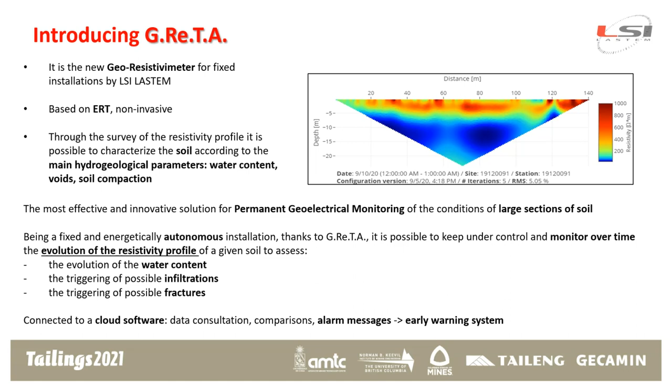The system is an off-the-shelf solution, easy to install in a maximum of one working day with 2 technicians, and does not require a complex configuration, which can be done remotely if required. Here there is a short video with the characteristics of the system and some of its applications.

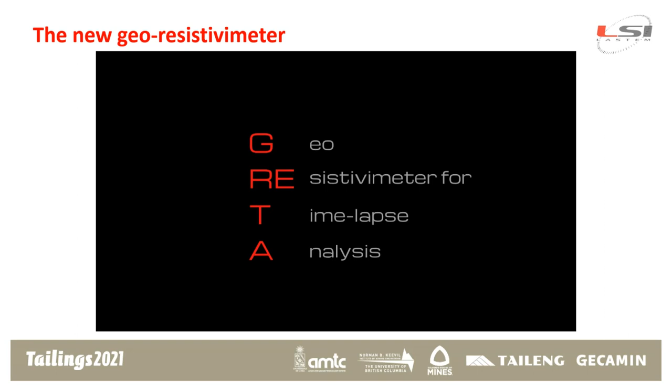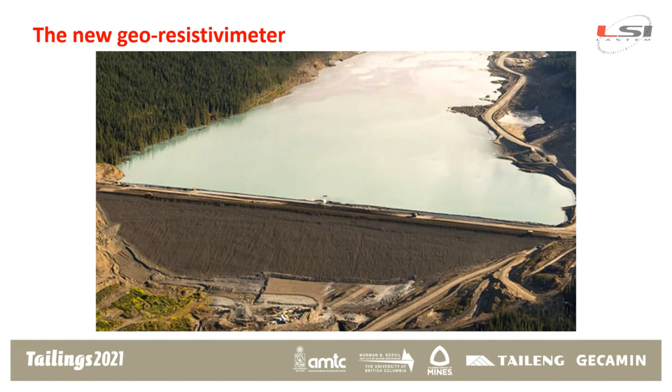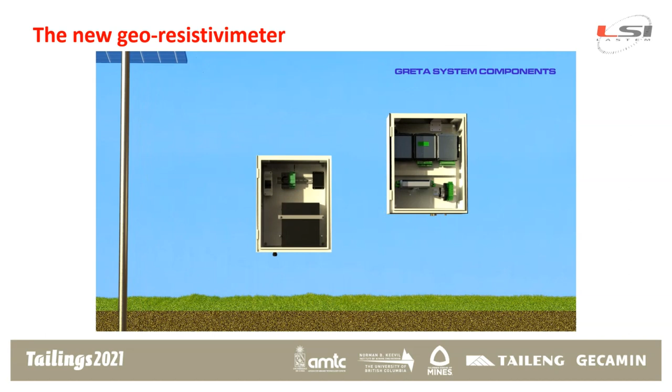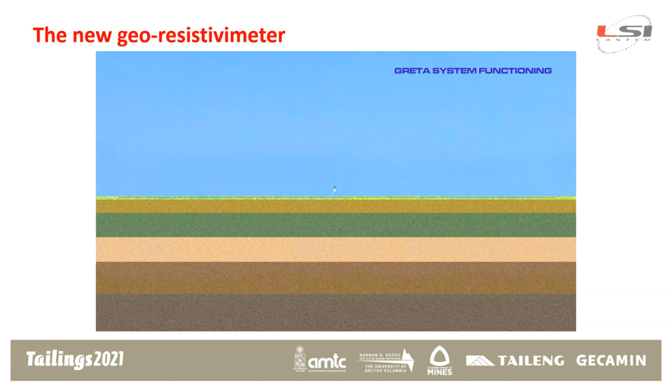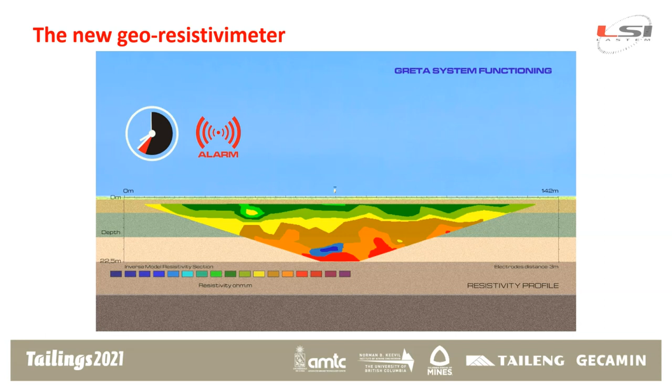The system comes with 2 cables with a total of 48 electrodes. They inject current and measure the voltage to obtain the apparent resistivity map that is then automatically inverted in the cloud software. When subsoil characteristics are changing, the system automatically sends alarm messages. G.Re.T.A can be integrated with all the meteorological sensors from LSI Lastem.

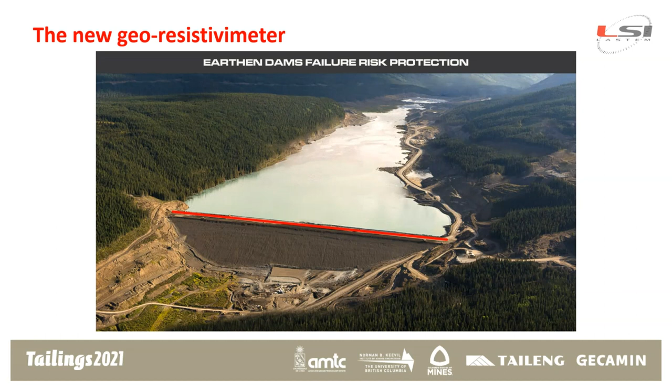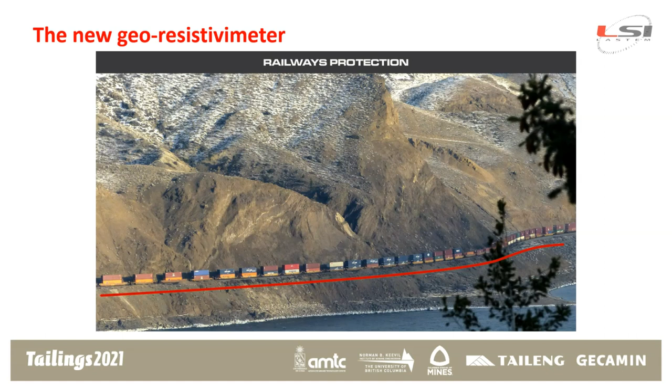Now some examples of the fields of application: monitoring of earthen dams, levees, railway infrastructures, and landslides. The system is very effective also for contaminated sites and landfills. Precision farming is another possible application.

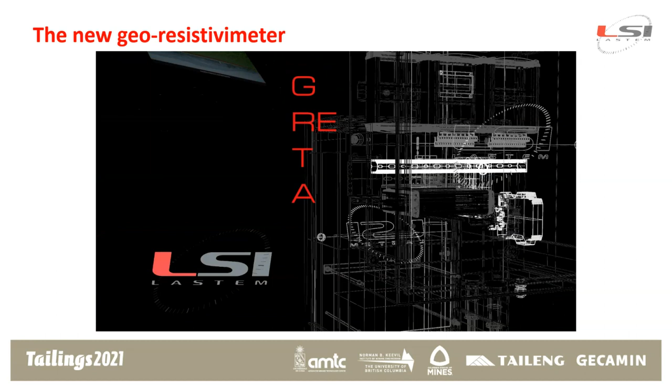The increasing number of tailings dam failures in recent decades highly demands setting up reliable systems to monitor the stability of these structures. Appropriate design, efficient operation, and continuous monitoring are key solutions to guarantee the stability of earthen embankments, including tailings dams.

Electrical resistivity tomography, ERT, is widely used in the mining industry for mineral exploration, groundwater studies, characterizing mine wastes, and monitoring acid mine drainage. For these reasons, we present the capability of the G.Re.T.A system for tailings dam monitoring. Since the ERT measurement is volumetric and not punctual, the system can monitor large parts of the subsoil.

One of the problems related to tailings dams is the accumulation of water in some parts of the structure. So this system can be really effective in understanding the processes that undergo the dam body, alongside other more classical measurements, such as piezometric ones.

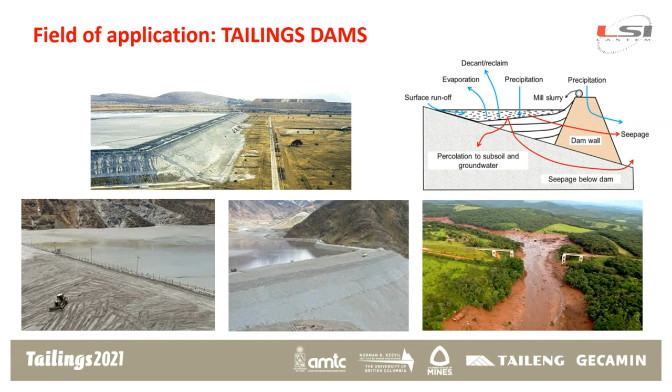One G.Re.T.A system was installed last August in a tailings dam in Chile during 2 different medium-term monitoring campaigns. Unfortunately, the name and the satellite view of the tailings storage facility cannot be disclosed, respecting the privacy of the owner.

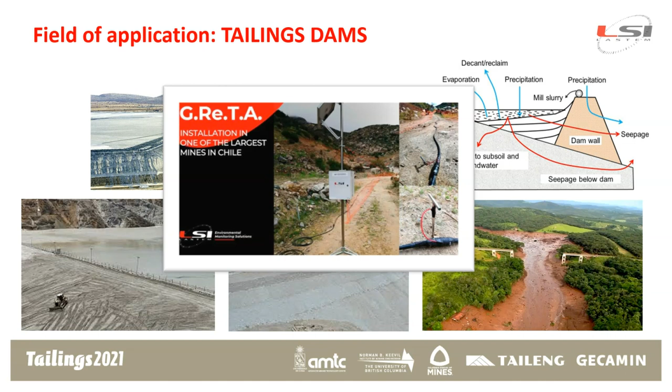G.Re.T.A is based on a well-known geophysical technology, electrical resistivity tomography (ERT). The method is based on the insertion of an electric field in the ground through input electrodes and the measurement of the voltage in other electrodes. From the measure of the voltage, it is possible to obtain, through Ohm's second law, the electrical resistivity value, which is a peculiar characteristic of all materials.

The measured sections need to be processed through tomographic inversion that, for the G.Re.T.A system, is hosted directly on the cloud software. In this slide, you can see a typical configuration with the solar panel, but the system can also be connected to the electric grid if available. In this case, the frequency of the measurements per day can be higher.

Inside the box, there are the different modules: the signal switching unit, the signal driving unit, the main processing unit, the power unit, the battery, and the communication part with a 4G modem router.

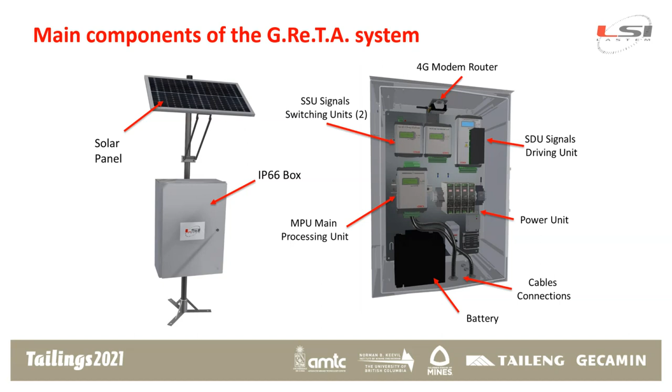Unlike the common and multi-purpose portable geo-resistivimeters, the G.Re.T.A system is a standardized solution that can be customized, remaining within two main characteristics: a maximum number of 48 electrodes and a maximum electrode distance of 3 meters.

The most common unit electrode spacings are equal to 1, 2, or 3 meters, which allow horizontal length coverage equal to 47, 94, and 141 meters, and a maximum depth of about 7.5, 15, or 22.5 meters, respectively. Cables and electrodes can also be installed vertically inside a borehole.

The horizontal installation can be done in two different ways. For a long-term installation, stainless steel plate electrodes are used, since they can be conveniently buried inside a small trench 40 cm deep that is covered.

For temporary installations, stainless steel rod electrodes are handier, since they are inserted in the ground while the cables remain laid down on the soil surface. So, if the user wants to change the position of the profile, it can be easily done.

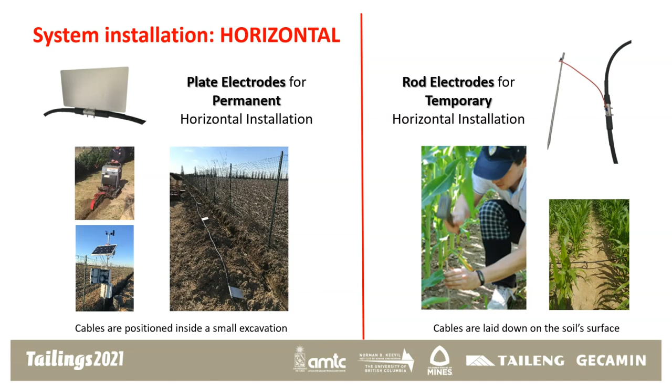The second type of installation is the vertical one, with two cables inserted in a borehole to a depth of 144 meters.

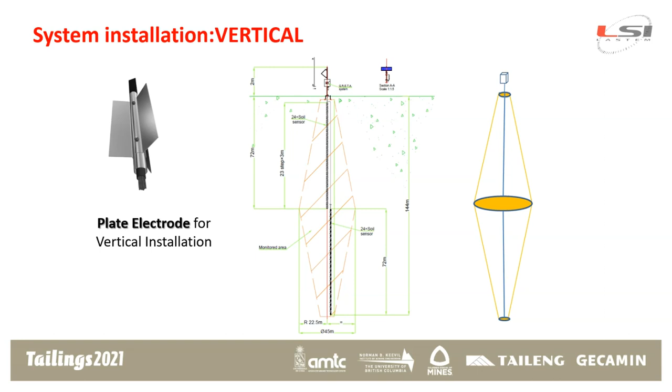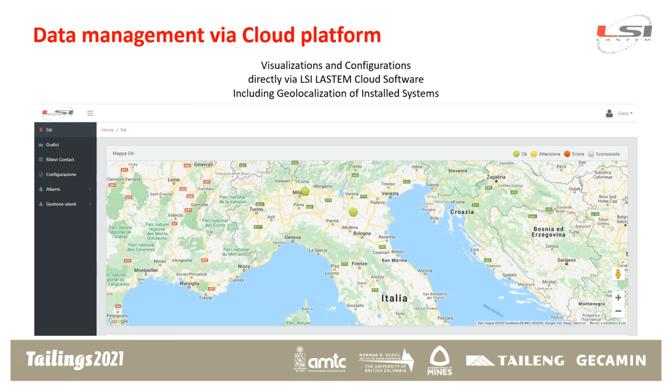The measured volume is a double cone where the average resistivity around the core is calculated depth by depth. This is the home page of the G.Re.T.A Cloud software, where it is possible to geolocalize the system and to have a first diagnostic, thanks to the traffic light that indicates if technical problems are occurring.

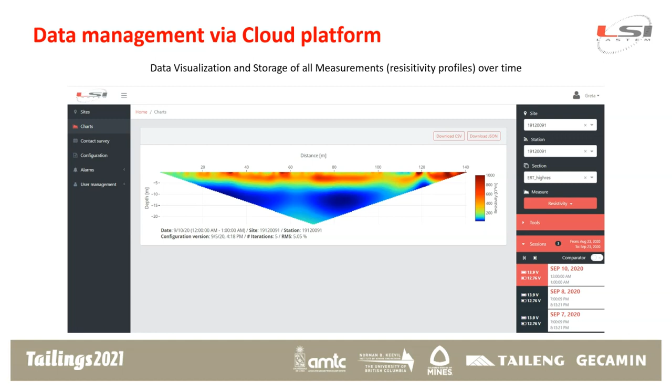Thanks to the platform, it is possible to program the measurements and to see apparent and inverted resistivity maps day by day, since the inversion algorithm runs automatically every time data arrive in the cloud. From the calendar, measurements from different days can be selected and also manually compared. All measurements can be easily exported to other software for further analysis.

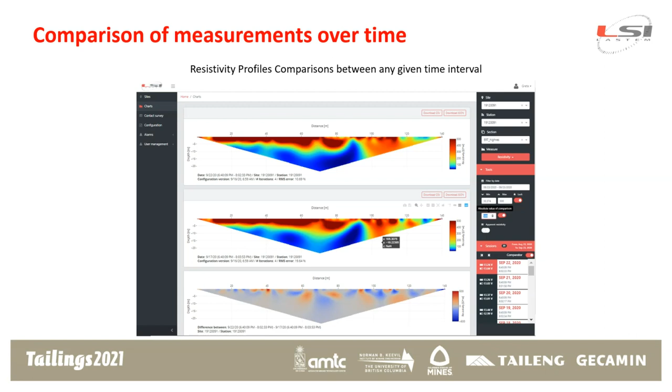One strong point of the platform is the possibility of setting thresholds based on percentage of variation in resistivity, and when set thresholds are passed, the system automatically sends alert messages to the defined users. It is possible to insert a calibration curve to correlate resistivity to soil water content. To do so, core samples have to be analyzed in the laboratory to define water content.

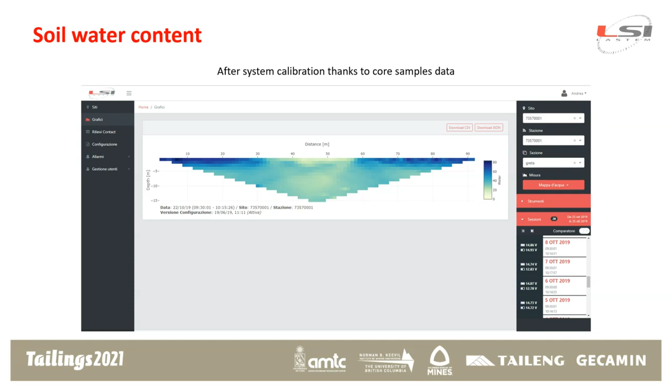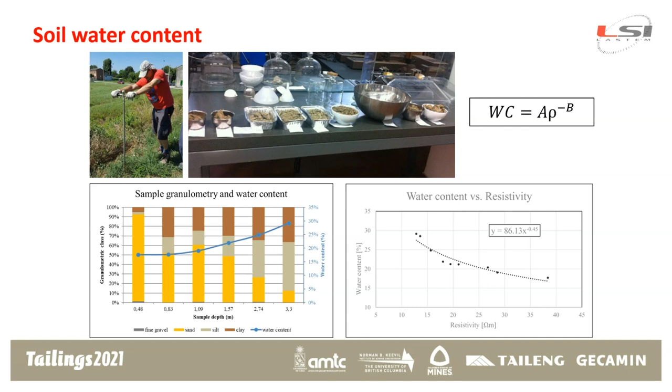The calibration can be performed by extracting core samples at different depths, taking the samples to the laboratory, and determining the gravimetric water content along depth. Knowing the resistivity at each depth, it is possible to calibrate a site-dependent function that links the two variables. Between resistivity and water content, there is an inverse proportionality function.

Now some slides about the case study of the installation of G.Re.T.A in a tailings dam in Chile. The aim of the monitoring was the localization of the phreatic level downstream of two wastewater ponds, the comparison with piezometric data over a long time, and the correlation with the variation of the water level in the ponds.

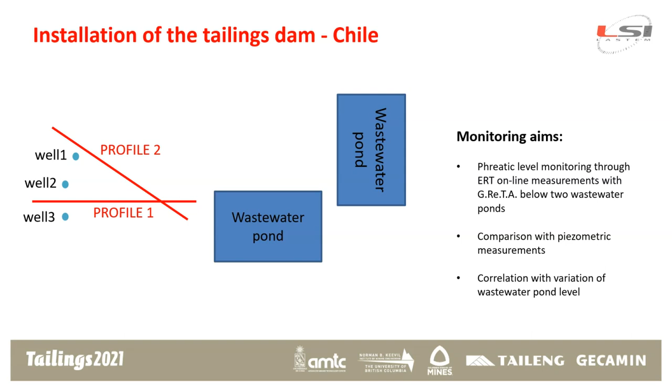Profile 1 is parallel to the underground water flow, while profile 2 is in a way perpendicular to the flow, although topographic variation prevents the exact perpendicular positioning of the profile. The position of the three wells is indicated. Here are some photos of the first profile.

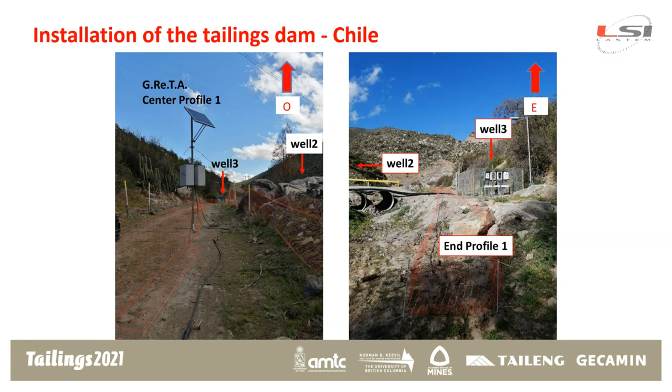The distance between electrodes is 3 meters, with a total profile length of 141 meters and a maximum investigation depth of 22.5 meters. On the side there are 3 installed piezometers, and their position is indicated in the images. In this case, the solar panel option is selected in order to obtain an autonomous installation, since the site is remote. And here some photos of profile 2.

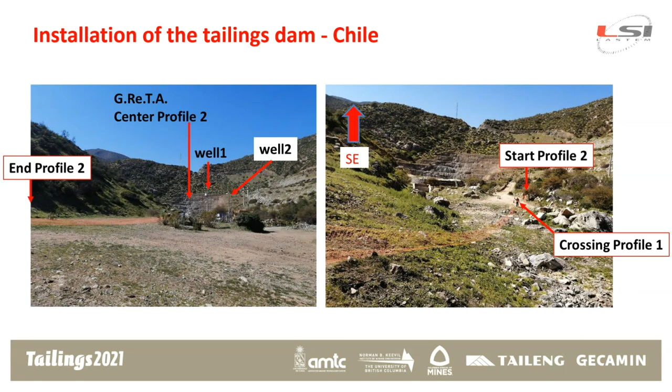Rod electrodes are selected in order to move the profile after each medium-term monitoring campaign. 1 measurement per day is programmed. I show only some results from profile 1. Contact resistances are always an issue in arid and harsh environments, such as in tailings dams, even more so since rod electrodes were selected in order to move the profile after 2 weeks. Good contact resistances are essential to have good quality data.

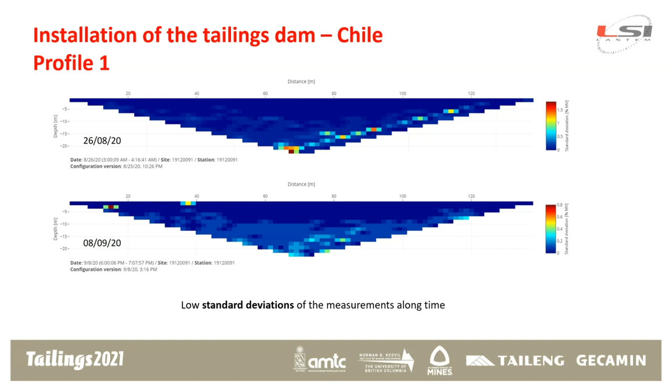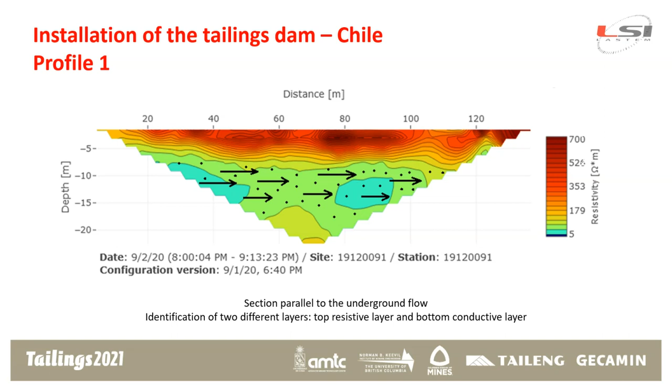In conclusion, G.Re.T.A is an innovative geo-resistivimeter meant for fixed installation that is an effective solution for the monitoring of subsoil processes in different fields of application, such as earthen dams and tailings dams, levees and earthen embankments, and contaminated sites. Continuous geoelectrical measurements can indicate the processes and variation in progress in the dam structure caused by seepage, fractures, or different soil water contents.

G.Re.T.A is a totally autonomous system, easy to install, and does not require great maintenance. It allows the continuous geoelectrical monitoring over time of large subsoil sections and the effective management of early warnings. The installation on a tailings dam in Chile was successful and provided good data. Contact resistances were tested along the installation period and were maintained low. Standard deviation of the measurements was good, and resistivity data were related to phreatic level near 2 ponds, where observed data through piezometers matched G.Re.T.A data.